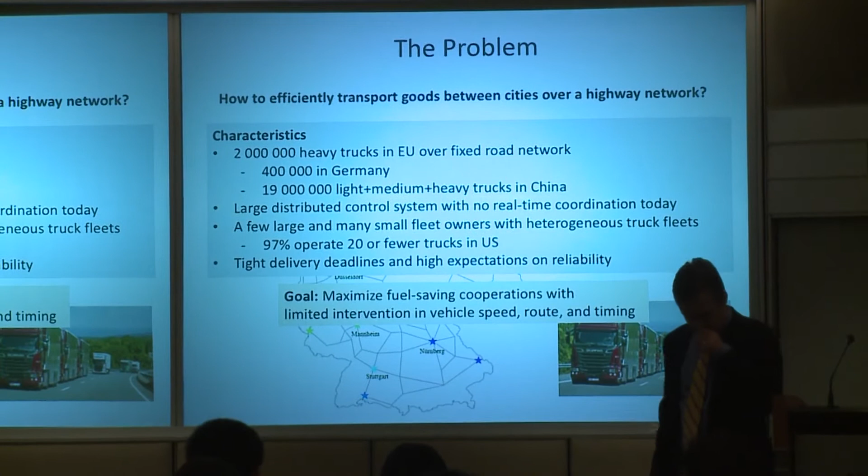And that's how it works. It also has some other characteristics which are quite interesting when we want to formulate this as a scientific problem and solve it. Of course there are a lot of constraints and objectives and so on, but I will try to simplify the story to start with.

So the problem I'm interested in is, compared to what's being done today, can we do this in a more efficient way by not changing completely how we drive around over this network, but adding cooperation in a systematic way? What you will see is that cooperation will mean trucks traveling together in vehicle platoons, but also other types of cooperation. So that's the problem I'm interested to understand. How much could we do on that?

And what could we say? How can we motivate this problem? What are the characteristics? If we start from a societal viewpoint, what we can first of all say is that this costs a lot of energy in society. Transport, as you know, on a broad scale, is 1/3 of all the energy we are spending in the world. And freight transport on roads is a dominating type of transport when we look at surface transport.

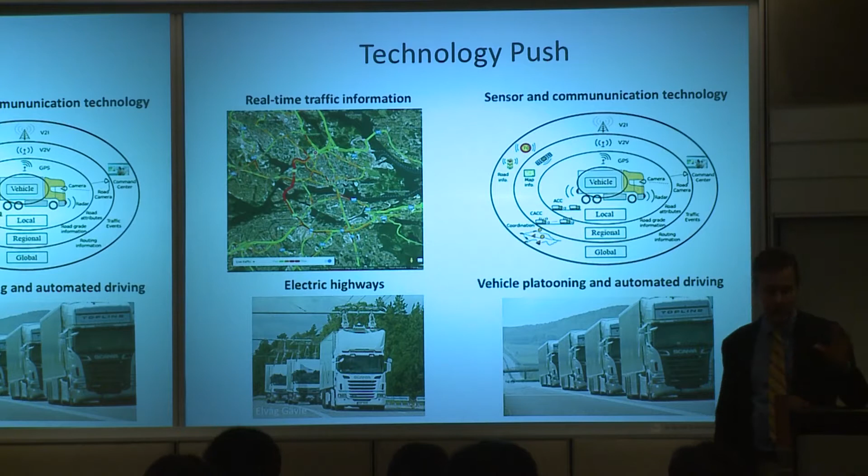So if they do that, what we can do is allow these 2 vehicles to go together in a platoon like this. And if they do that, they will save some energy. If we now would know all the different transport missions going on over Europe, we can try to do matchmaking automatically.

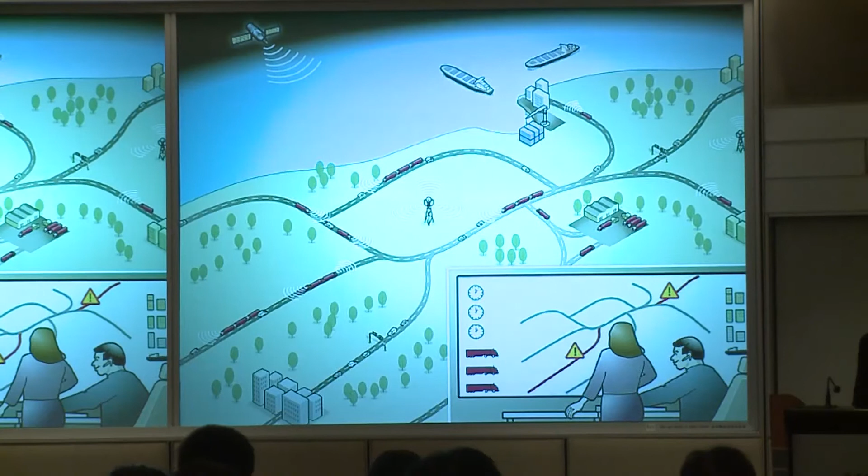I will come back also to talking about what other industries are doing. So you can say that basically all major truck manufacturers today are investing in this. It's a big area now.

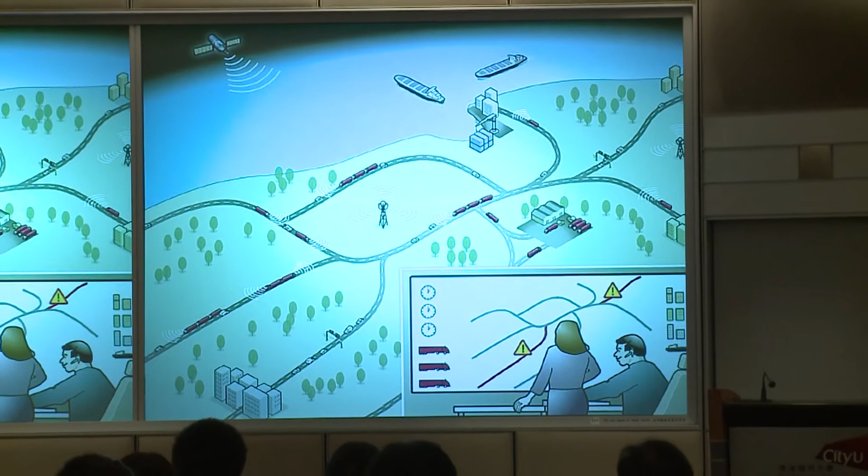The picture I want you to have now is to think about that in the future we will have a situation like in my cartoon here. So you see that we still have transportation from ports to cities to industries and so on. The difference is now that they will go in platoons, and they will form these platoons on the road.

We could describe this as, in many cases when we look at control of complex systems, in a hierarchical way. So what I talk about here is that on a lower level we have the vehicles and the platoons. One level up, we have something which I call cooperation - with that I mean we need to be able to interact with the other vehicles out on the road so that we can form these platoons on a large scale. And further one level up, we have something here which I call a fleet layer.

This gives possibilities so that you have two different fleet owners, those who have 10 or 20 trucks each - they could collaborate now. Today you don't collaborate because you don't want to give up your customers and so on. But if you construct a market out of this, you can open up a completely new type of business. So that cooperation could be done on the fleet layer, and typically the big ones have something like you see here down to the right, namely people working in a back office - maybe in Stockholm if you have operations over Europe, where you follow all the trucks, a little bit like air traffic management.

So in my talk here today, I will describe a little bit from bottom up here, from the platooning to the formation to the fleet coordination.

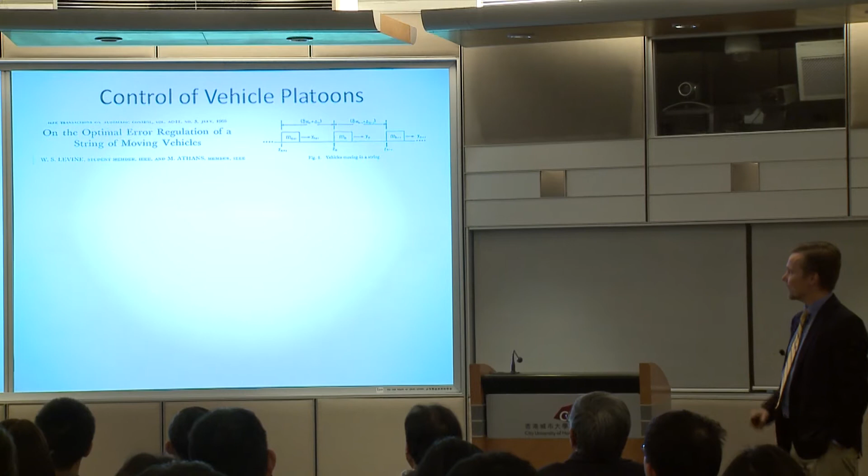Let's start with vehicle platooning. Control of vehicles has been studied for a long time in the control area. More than 50 years ago, there was a paper from MIT: Bill Levine and Mike Athans wrote about controlling a platoon of vehicles as a string of masses, and developed some theory around that.

The biggest success when it comes to platooning is probably the PATH project in California, on the automated highway, where they demonstrated outside San Diego in '97 that they could control a string of vehicles going close together, and also described how the whole system could be automated.

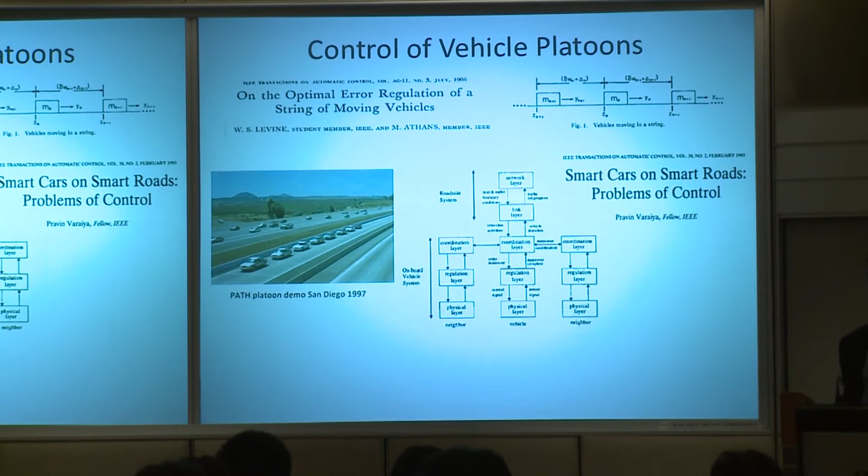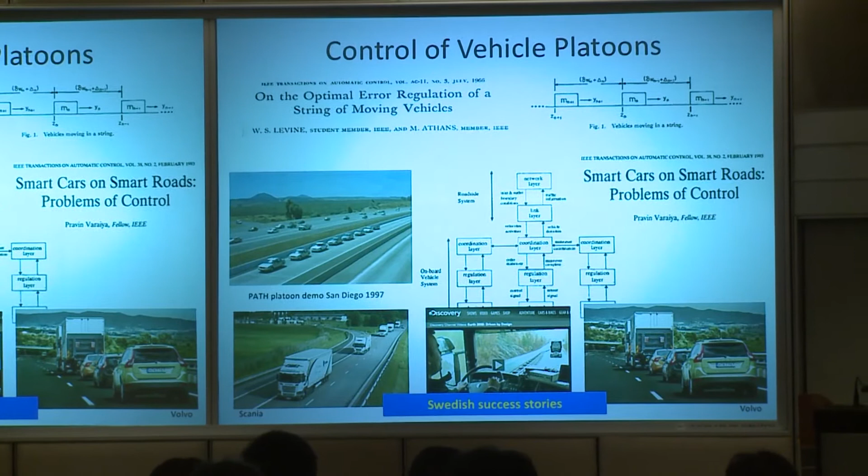Since then, a lot has happened, particularly in the last 10 to 15 years, and that's what I'm going to talk about. In Sweden, we have two commercial truck manufacturers, Volvo on the west coast and Scania on the east coast, and both have been early adopters of this technology. We have projects with both of them, though of course they are fierce competitors, so they don't give up any ideas to the other.

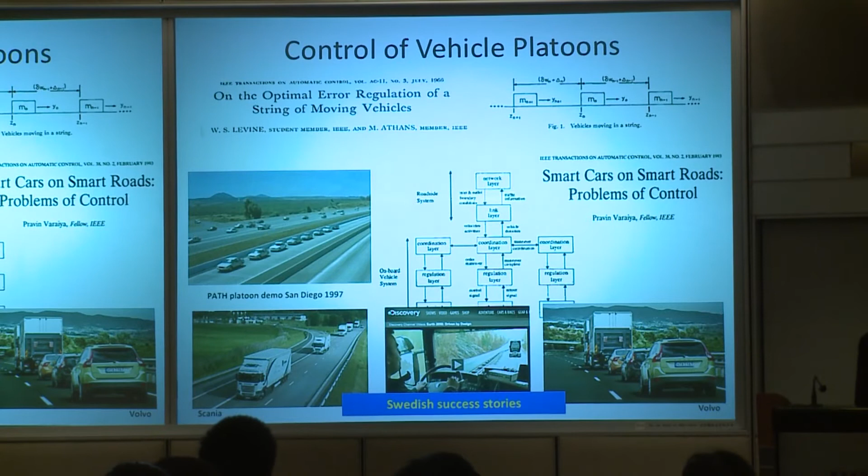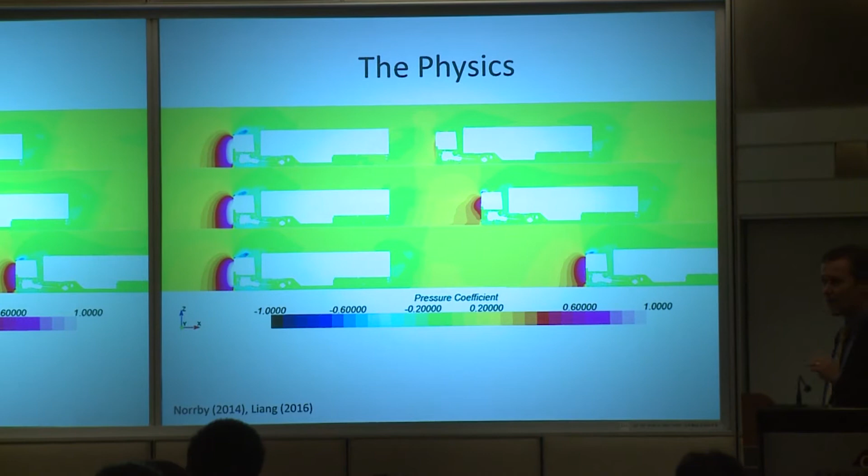Let's first go back to physics. Why do we do platooning with trucks? It's very simple. Here you see a CFD simulation where the color indicates the air pressure. You see that when there's sufficient distance between the two vehicles, the air pressure they experience is about the same, while when moving closer, the air pressure is reduced significantly.

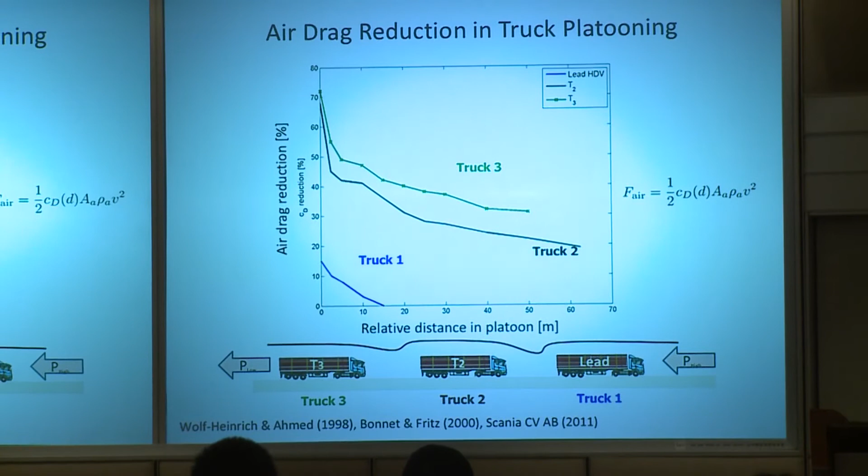So if we make the distance between the vehicles smaller and smaller, you see on the x-axis the distance, 10, 20 meters. At that point, the air drag reduction, on the y-axis, can be up to 40-50%. That's very much, and it means the fuel reduction for driving the truck can be something between 5 to 20%.

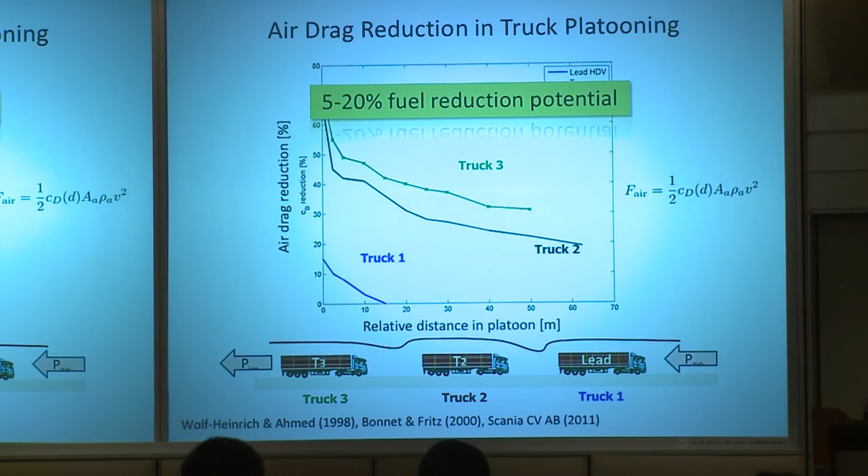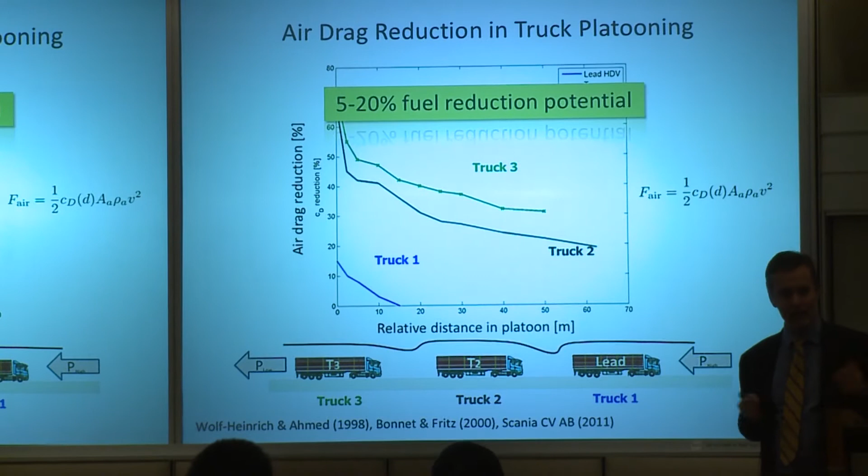Why that range is so big depends a lot on experimental conditions. Nominally when we run, it's typically 10%. And if 10% of the fuel can be reduced from something that consumes 10-15% of all the fuel or energy we spend, you can imagine this is an enormous figure even if it's just a few percent.

Of course, we cannot do this if we are not automatically driving the trucks. We get this benefit when we are 20 meters or so apart. So we want to be that close, but we cannot expect a manual driver to drive that close, so we need to do that automatically. Let's go into detail on how we control the individual vehicles in this platoon.

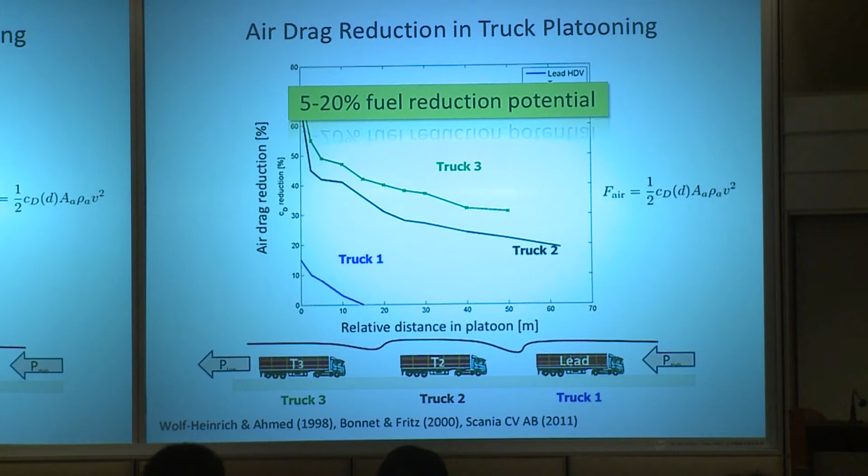To start with, let's go back to a single vehicle. How do we automatically control the velocity of a single vehicle? This is not as simple as just keeping constant velocity as it used to be. Instead, what we do...

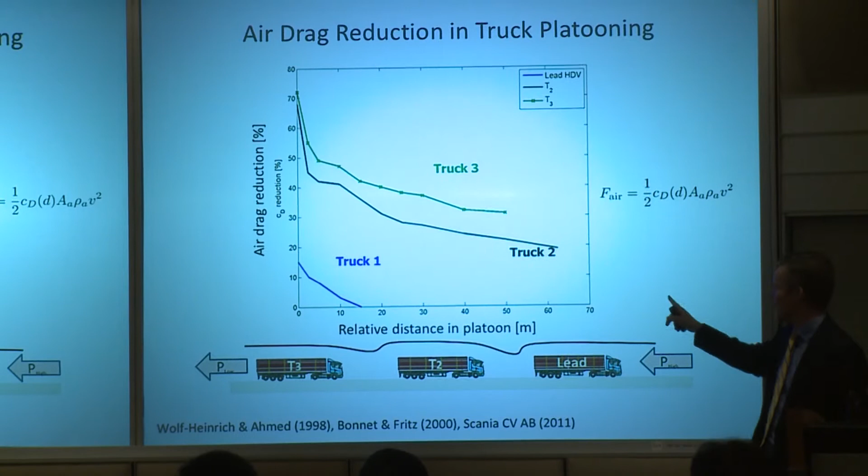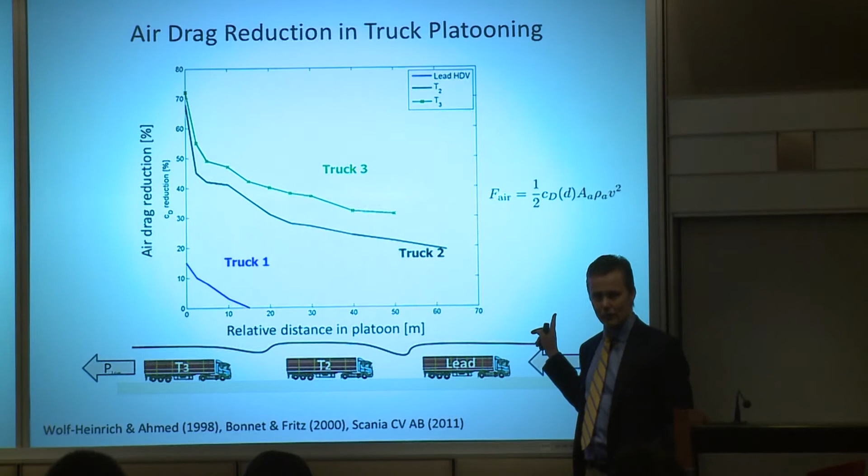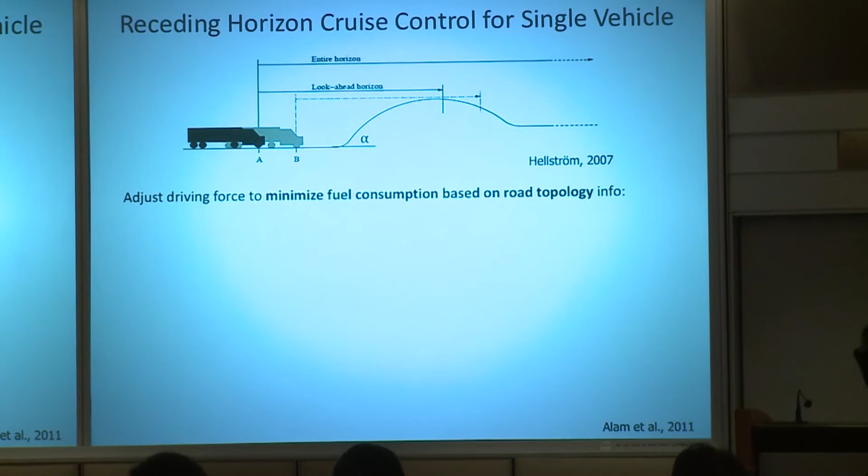So what you do to regulate the velocity is solve online an optimal control problem. It's not very advanced, you can go back to the classics. You formulate the fuel consumption for a vehicle that should traverse a hill with some slope alpha, and formulate the cost function for fuel.

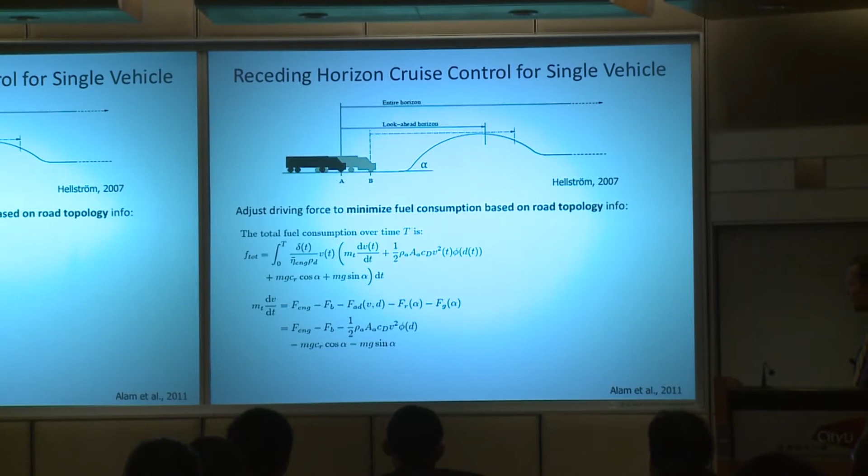So how much fuel does it cost? You get an expression like this, where you integrate over a horizon, typically a couple of kilometers that covers that hill. Then you write out Newton's equation, and you get an optimal control problem which you can solve. When you solve this, you get solutions which are very intuitive.

What you see down here is that we have an uphill, so this is altitude going up and altitude going down. In the bottom plot you see the velocity. If you have a light truck, like the blue one, you see that you should just keep constant velocity. If you don't have to, you shouldn't change the velocity. It's always best to go with constant velocity.

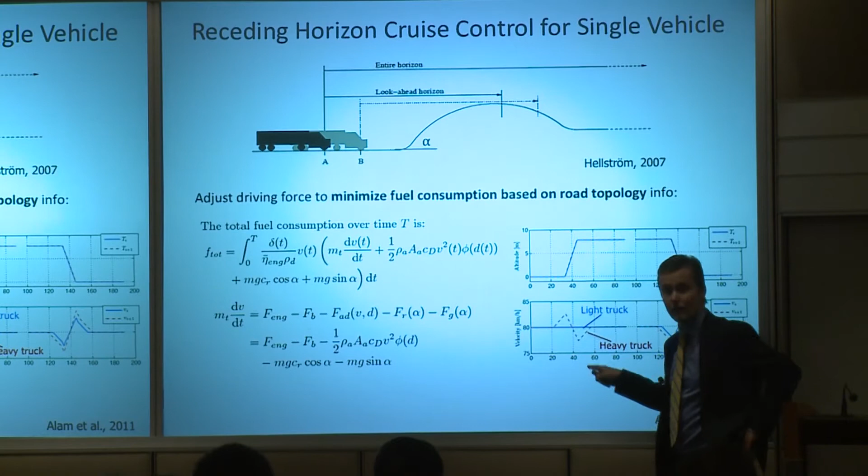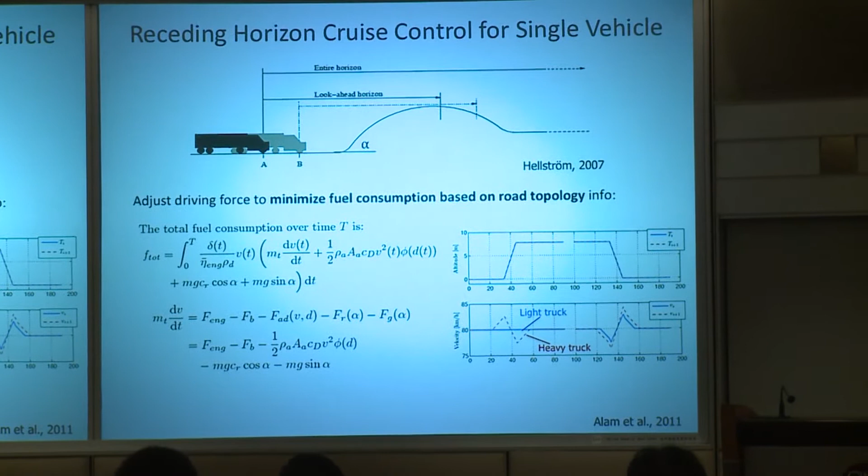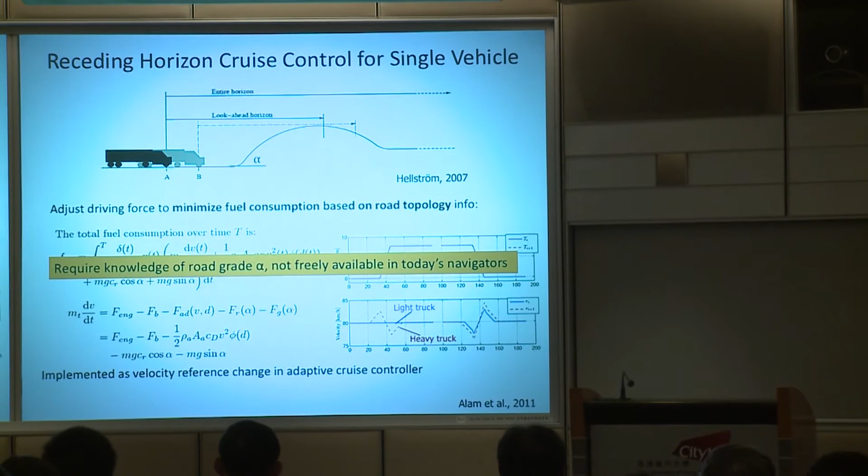But if you have a heavy truck, the optimal thing to do, as you see here, is to speed up a little bit before the hill, then let the velocity go down, and vice versa in the other direction. So this is optimizing the fuel and reducing it a little bit. This suggests the optimal velocity, and you can implement this into the controller that keeps the velocity. Of course, this assumes you know the road grade, which I will come back to.

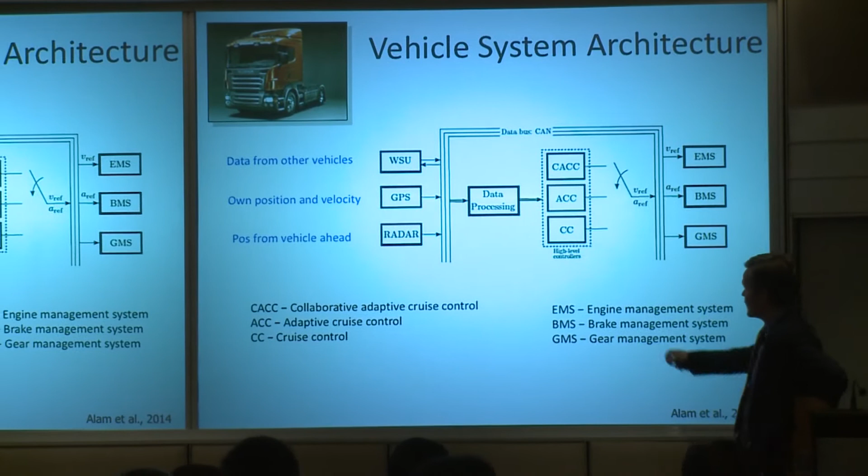So that is the control mechanism we have in place today. Let's now look at the control architecture inside the vehicle. So here you see the control system. From the left we have the sensor information input, so data, for instance, from other vehicles, their position and so on, and we know our own position. That goes into the controllers, the different cruise controllers here in the middle, and then we actuate over here.

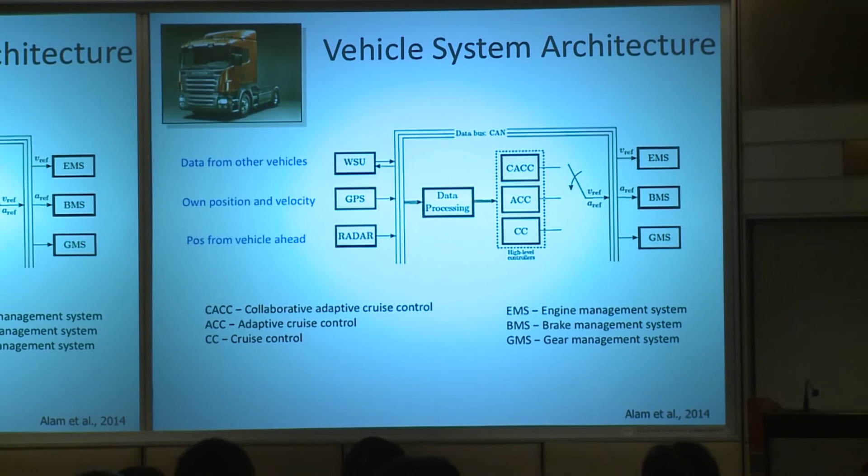I talked already about the engine management system, that is where we send the reference velocity. But of course we also need to control the braking, so the braking management system and the gears, the gear management system. So this is basically the control that we have.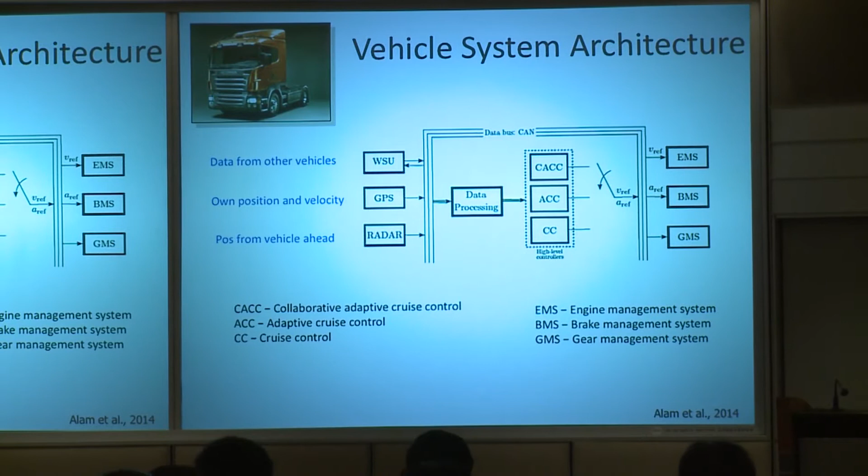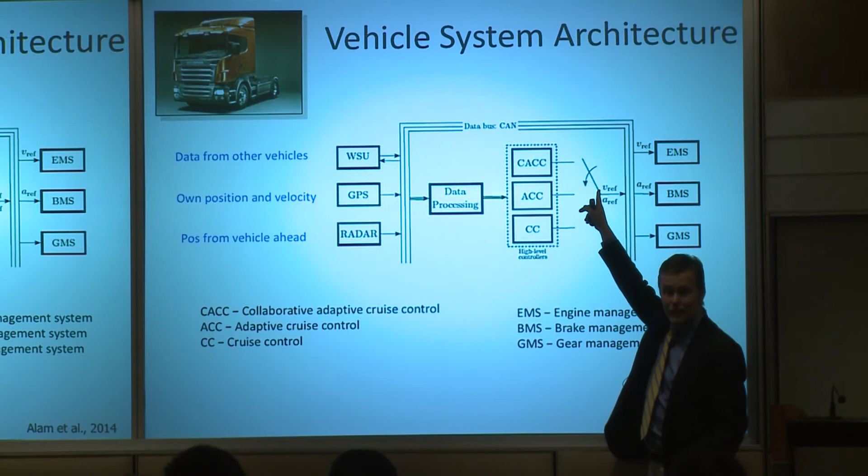I put this slide here just to emphasize that when we do something more advanced, like the CACC, the Collaborative Adaptive Cruise Controller, which is the platooning, I don't change basically anything in the vehicle. I only change a piece of software that sits here. Another thing is who has control of that switch - the driver has control of it. So we don't at this point take over completely from the driver. The driver can always decide what he wants to do.

If he accepts that we go in a platoon, then we run a system which would just look like that, right, what you would expect. Where vehicles are exchanging information either via their radar, so they measure their distance to the vehicle in front, or via wireless communication - either Wi-Fi, vehicle to vehicle, or vehicle to infrastructure, and infrastructure back to vehicle.

So let's go into a little bit of detail on how the control is being done on the lowest level. What I said was that it's important to be close, right, so we want to regulate the distance between the trucks. And it's obvious if we have a long string of vehicles that we would like that to be distributed - maybe each vehicle would like to just control based on information from the vehicle ahead and so on.

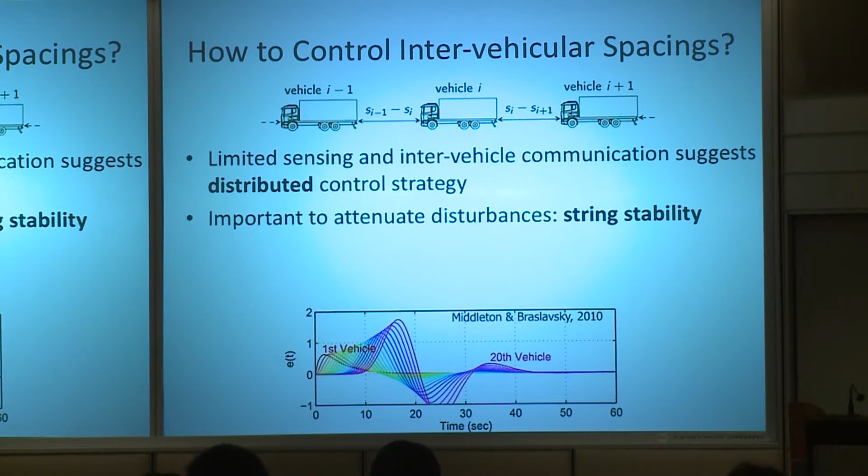That problem has been studied for a long time, and it's well known that what we can get is something called string instability. What that means is that the disturbance in the first vehicle could propagate and increase as we go down the string, as you see here. That's what we want to avoid, and there have been different studies on when we can avoid that. What's important is that most of these studies are theoretical.

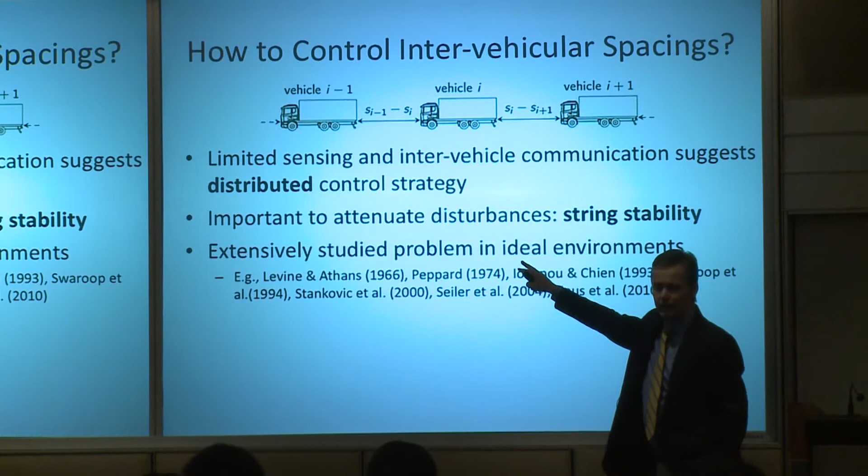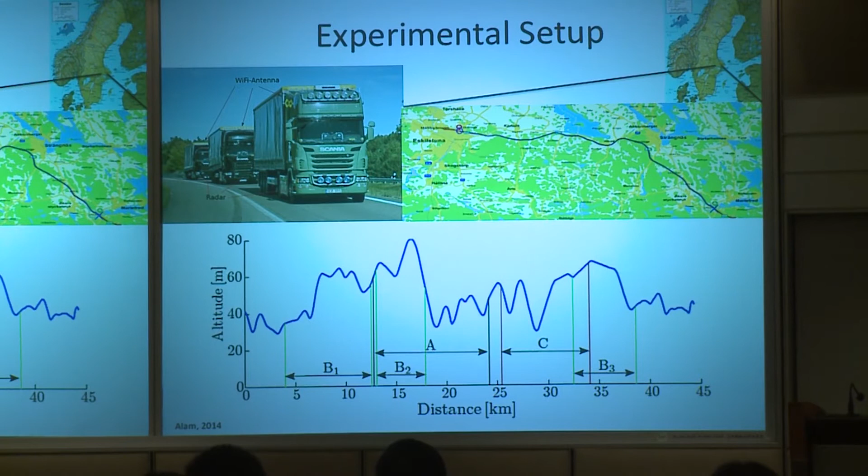After these experiments we looked at the data. Again, the control architecture was that simple, distributed one I mentioned: each vehicle controls its own velocity, and then it communicates to the controller behind. This is what we achieved - in the top plot here you see a segment, just a few kilometers.

So it's an uphill, downhill, and so on. The second plot shows the velocity. The third is the distance between the vehicles. Here you see the torque generated in the two first vehicles, and that's the braking of the second vehicle.

As all of you with a background in control or vehicles can see, this is bad, right? You see the second vehicle, the black one, when we are going downhill there, the velocity oscillates. The first vehicle, the blue one, is doing something you would expect: the speed picks up because you're going downhill. The second vehicle should just follow that vehicle, so it should have constant velocity, but it's not. There are oscillations, and we see the distance between them is oscillating too.

And you see even so that the second vehicle has to brake. And we talk about saving fuel—so the worst thing you can do is brake, because that means you are losing fuel, right?

So when we got this—my student who graduated in 2014 did this experiment some years earlier—when he got this result, we didn't look there first. He just looked at the data of how much fuel you would save over these three weeks of platooning, and the total amount of fuel saved was something negative. So he came back to me, his advisor, and said, I cannot defend my thesis on platooning now because I've shown that you spend more fuel with platooning.

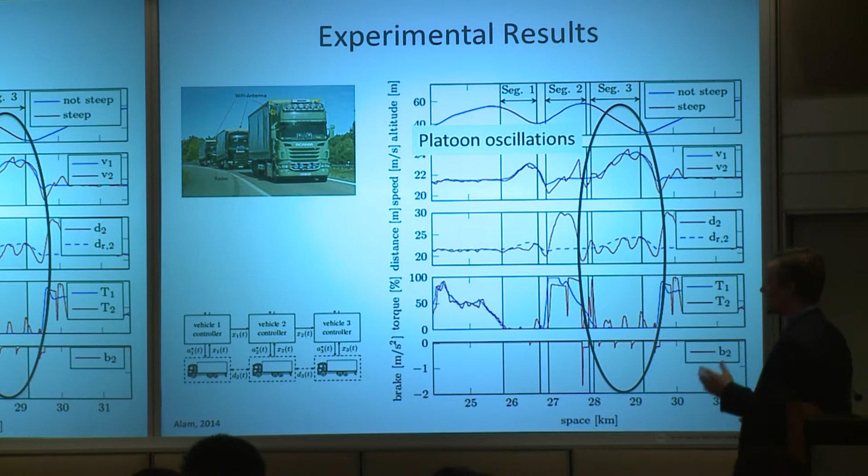But that was, as with many good PhD theses, an encouragement to start a new PhD. So we went in and started to look at the data, and that's when we found there were a few segments like this where the controller was doing badly. And then we thought maybe we shouldn't trust this control architecture in the literature—maybe we should think a little bit about that.

Two important things here: one is that topography variation, the hills, maybe plays a very important role that we hadn't thought about before. And another thing is, how should we regulate the distance between the vehicles? Maybe we shouldn't regulate the distance—maybe we should regulate something else. I'm going to show a little bit what that means and our new controller that we came up with.

So let's do a simple thought experiment just to see our idea before we get into the mathematics. Let's say we are driving on a flat road and then we come to an uphill. We will never know perfectly where that uphill is, right? We always have some uncertainty. Let's say you want to keep a constant velocity.

Then what this vehicle is going to experience is a little dip in velocity there, exactly where it hits the uphill. I can plot that over time, to the left, or I can plot it over space along the road. For a single vehicle, there is no difference—it will just look the same.

Now what I do is put a platoon there, and say that the second vehicle can perfectly control its distance to be d to the first vehicle, and the third vehicle can also perfectly control its distance to the vehicle ahead. So, perfect control here—what is going to happen?

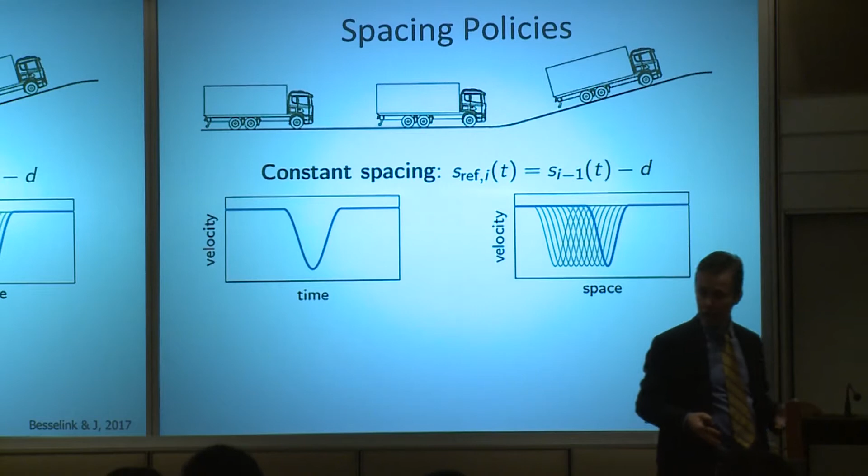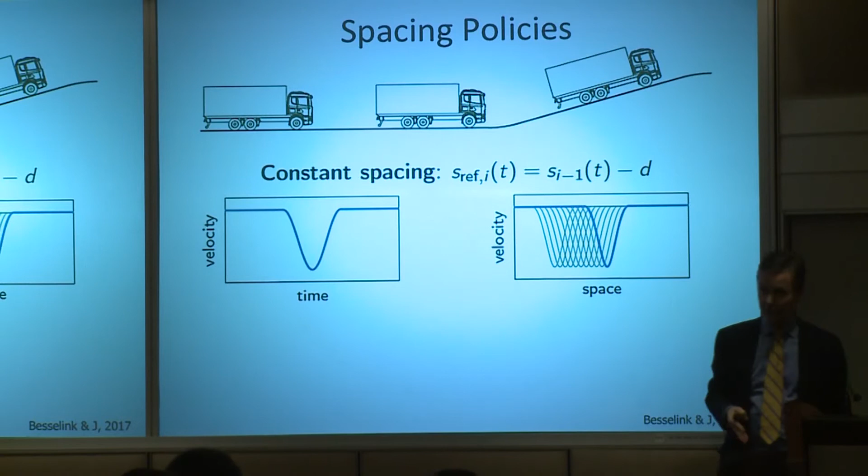When the disturbance of the road hits the first vehicle, all the other vehicles are going to experience the same disturbance, right? Because we have the same perfect control. But if we look at what is happening in space, the disturbance is going to hit at different instances in space. And if you animate this picture forward, what happens next is that the second vehicle is going to experience the same uphill, so it gets the same disturbance twice, and then the third. So you see that there is something that could happen—some sort of propagation of that type of disturbance that we didn't take into account in the controller I showed you.

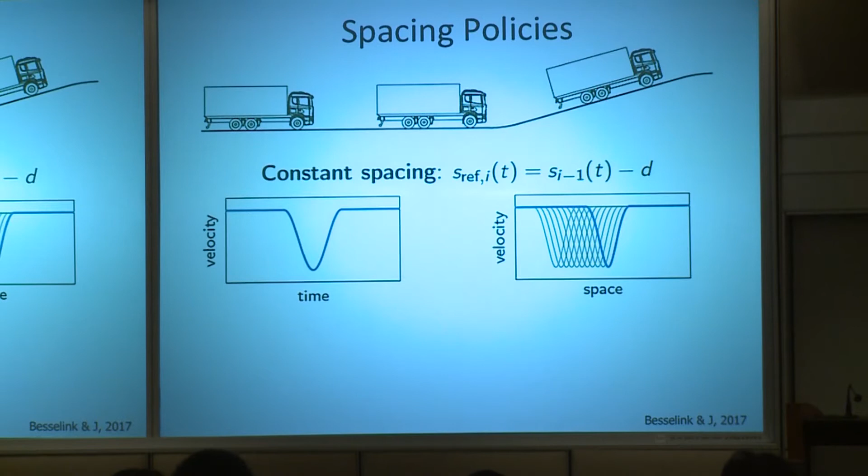Then we can regulate on something else—we can regulate on the headway, or on a time gap. So in this case, I try to keep delta t—I'll come back to what delta t is—but I try to keep a time gap. And if I keep that time in a good way, I can get the completely swapped situation to the one I had before. I can make sure that in space now, the disturbance is going to hit us at the same point. And that seems to be a good thing to do.

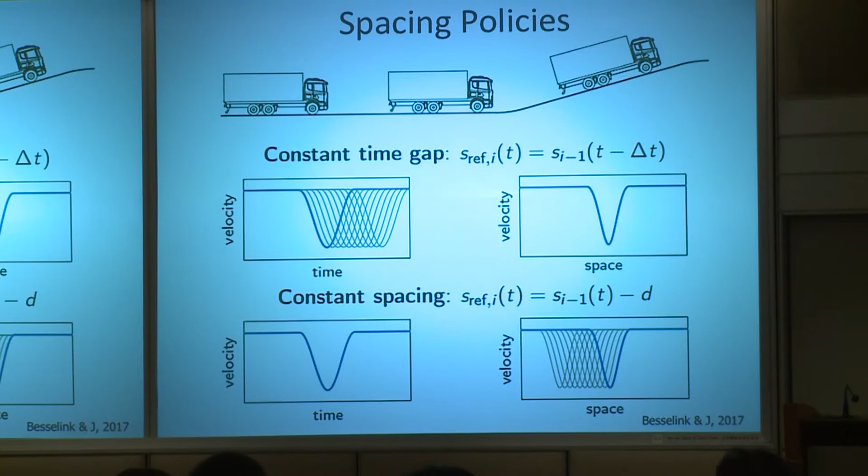So if we believe that is a good thing to do, what are the consequences? One very interesting consequence from a control architecture viewpoint is that keeping a fixed time gap between vehicles is equivalent to keeping the same velocity in space. So it's like encoding a reference velocity along the road, that's what I've written there. So what consequence does that have for a control objective?

Instead of regulating one thing, we should regulate two things in hierarchy. We should make sure every vehicle is able to keep that velocity over space, and then regulate their relative position according to this time gap. So it's a control architecture where we pull out the reference and let someone else decide that, and then we do this local regulation. This we can also motivate with some theory.

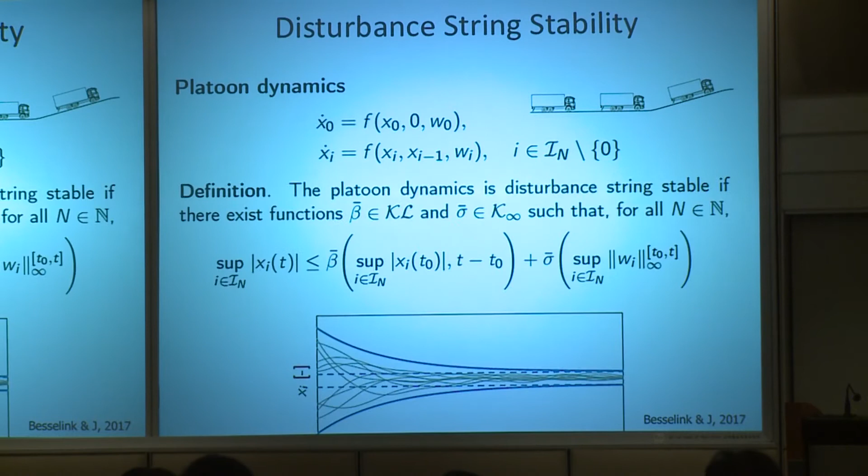We put this in a framework, and since string stability has been studied by so many, we develop a formalism on disturbance string stability. We have a number of vehicles given by some dynamical control system with input disturbances, and we say we would like these to be string stable in this sense—it's an input-to-state stability concept. We have some initial condition and some disturbance, and we want the state of each vehicle to be bounded for all vehicles in the platoon. This is the stability notion we are using here.

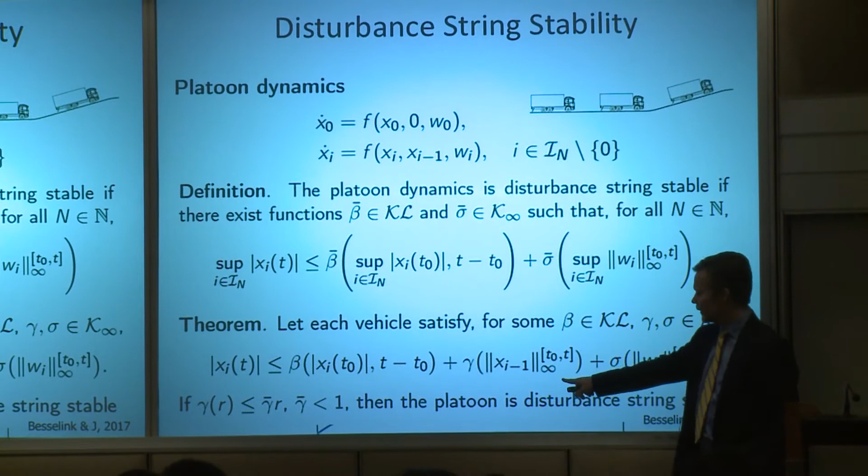We want to develop various types of control on top of this, so let me give one example. One thing we can prove is that we can take this concept and make it local. We can prove that if I can keep every state bounded by its own initial condition, what the vehicle in front is doing, and the disturbance—if I'm able to do that, a local condition—then the whole platoon will be stable in that sense I introduced before.

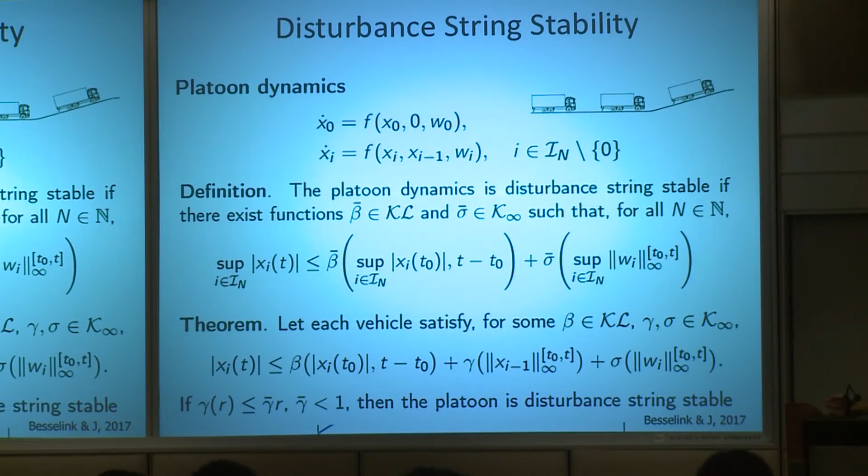Okay, so this seems fairly abstract, right? Can we actually come up with controllers that fulfill this? And we can—let's look at one such controller.

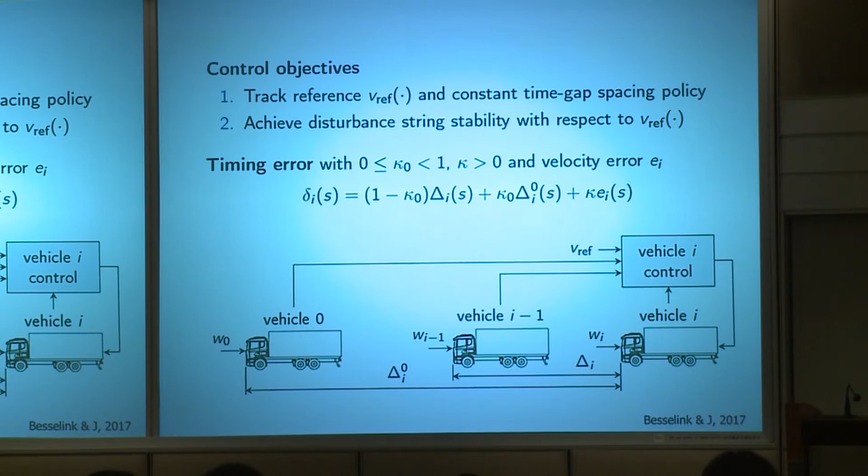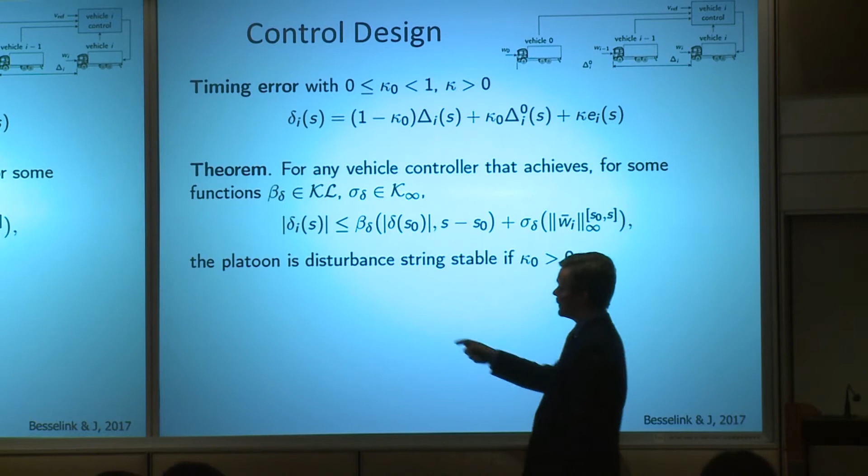In one case, I introduce a quantity—I call it small delta I. This is a quantity I would like to keep small, and it depends on the time gap to the vehicle in front, plus an error term, which is the velocity error. So I've weighted together how well I'm able to keep the time gap with the error in velocity, and that's what I'm controlling. If I'm controlling that well—and that's what this theorem says—if I'm able to keep that delta small in that sense, then this is string stable in the sense introduced before.

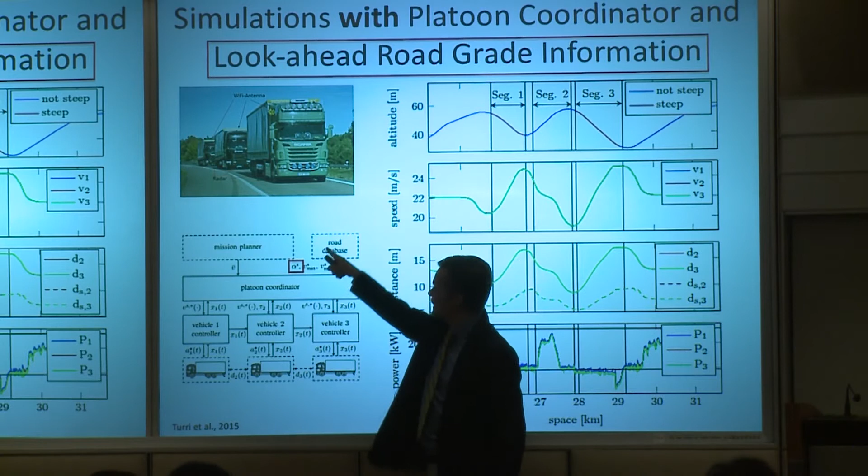Let's try that on the experiment shown previously. Notice two things: first, look down here to the left. This looks a bit more complicated before, but I only made two major changes. One, I've introduced the road grade—I have a road database that tells me the road grade, shown in the top diagram. I plug that into a new block called the platoon coordinator. The platoon coordinator computes the velocity, this vref I told you before, and communicates that down to the vehicle controllers, which execute that—they control so we try to keep close to that.

These are hi-fi simulations with very detailed vehicle models, and in this case it works very well. The velocity is changing, of course, because of the formulation I had, but all vehicles are able to keep that velocity, which in this plot is defined over space. Over time they will change, of course. Also notice the distance between vehicles will vary a little bit, but they vary here to benefit fuel consumption. So this is the way we choose to do the control in this layered way.

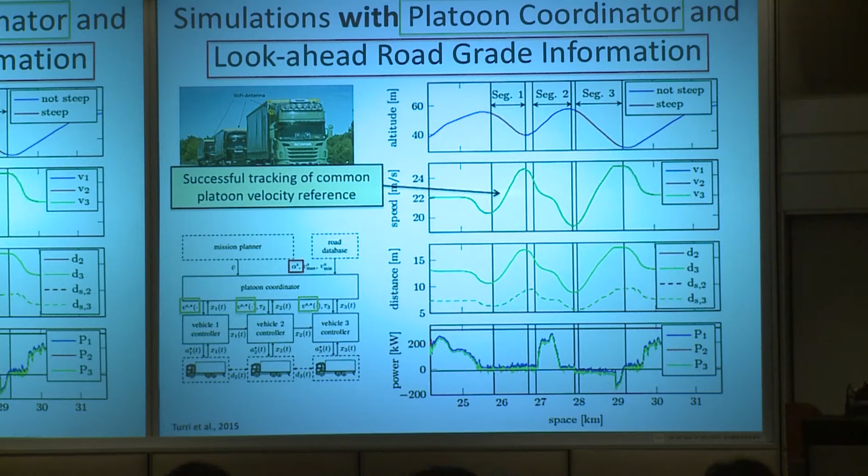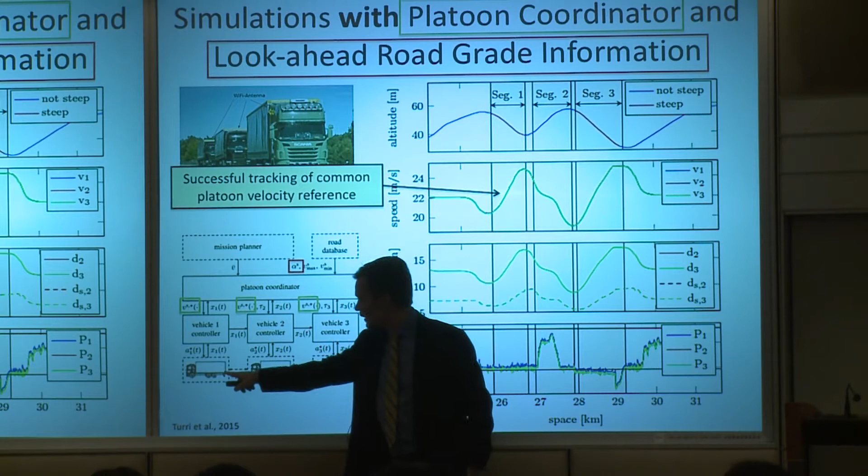Notice now that I didn't say where we compute this—who computes this platoon coordinator. Should that be done in the first vehicle, in all vehicles, or should it be done in the infrastructure?

This is one thing we are working on now: we try to move this out and put it in the cellular network. So if we think about having a cellular network, or if you're into cloud computing, you call this the edge cloud or the fog, right? You can think about controlling this process from the base station, and you move that control process with the mobile vehicles and do the control in this way.

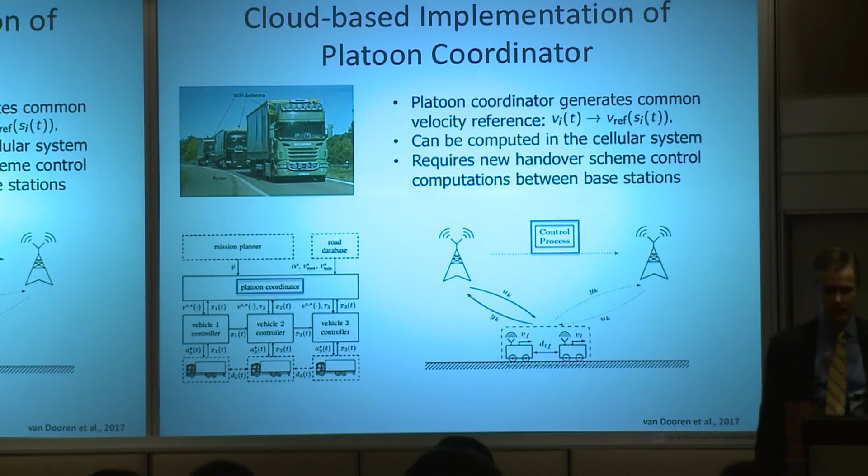Interesting also from a communication viewpoint is that this requires some changes to how the mobile system works. Because remember, even if me and Professor Cheng sit in the same car with our mobiles, the handover when we move from one base station to another is not synchronized. It could be that your mobile changes before mine, and so on. You measure more or less the quality to the base station, and this is an independent process.

Imagine now that you have 3 vehicles that you want to move together, connected to the base station. It's more or less like having 3 different mobiles, or 6 if you have both transmitters and receivers. So this wouldn't work if you don't coordinate it. You want a process where they move synchronously, because we're moving the control from one base station over to another, so that needs to happen in a synchronized way. This requires some changes to how handover is done, and we've developed some of this together with people working on it at Ericsson.

Okay, so this was a little bit on the lower level, on vehicle platooning. Let's now move up and think about how we should form platoons, how we form them online. The way we are doing this builds very much on what you saw before.

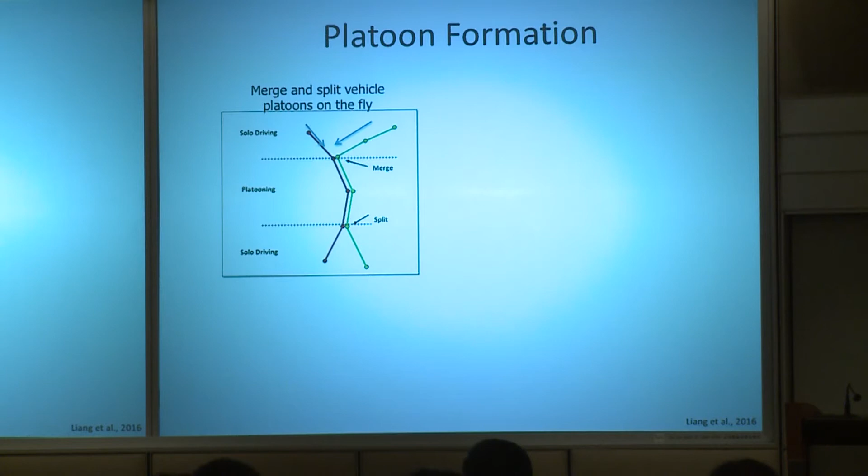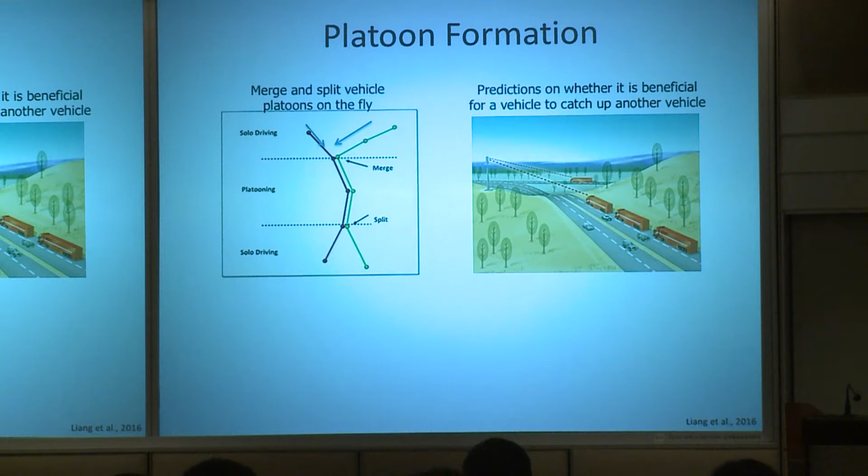Let's say we have vehicles coming from different directions, sharing a segment, and then splitting again. The way the platoon is formed is that we have control of these vehicles from the infrastructure, as you see in this picture. From the infrastructure, you compute a reference velocity, just like you've seen before, and this reference velocity is generated in the infrastructure and communicated down to the individual vehicles.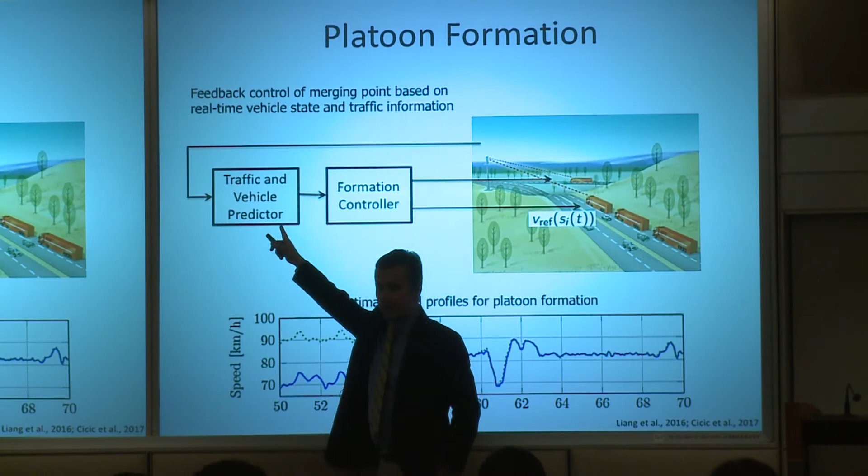The difference now is that we need to take into account traffic. Because if there is a lot of traffic around, you need to handle what velocity you will be able to keep in order to form that platoon. This understanding led us to try to understand better under what circumstances one could form platoons.

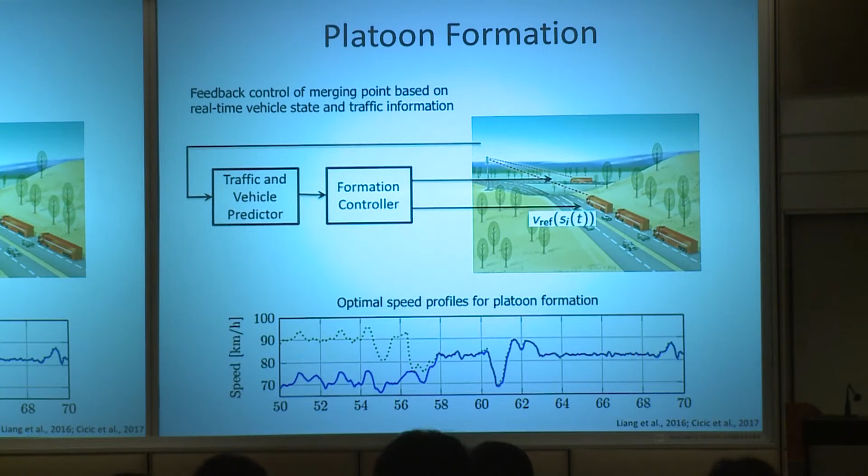As always, I think it's good to go to some experiments and see how this works. What you see here are experiments we did outside Stockholm, on a highway segment, just 10 kilometers or so. We went and tried to form this platoon over and over again. In these videos, we are sitting in the second vehicle, trying to merge with a vehicle in front of us.

This was done over 600 such test runs. I was not driving the vehicle, but anyhow, it was over a month or so. Notice that now and then we are passing these gates.

These gates have sensors that sense the flow, the velocity, and the density of vehicles. Out of this information, we can analyze data and get, so to say, a steady-state situation of traffic, and this is what in traffic theory is called the fundamental diagram. Here you have the density of vehicles on the x-axis, and on the y-axis we have the velocity or traffic flow.

You see that if we have low density, we get a linear increase of the traffic flow, which is what everyone would expect. Then at some point you reach the limit where the road isn't able to handle more vehicles, and you get saturation and congestion.

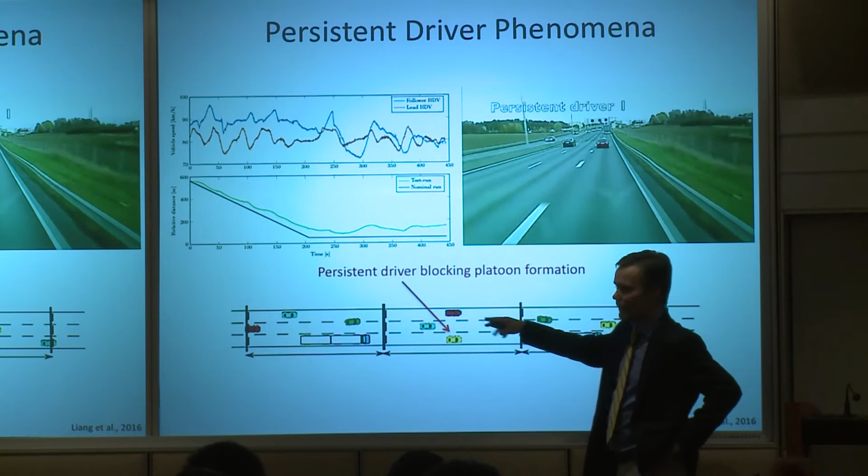You see that we try to form a platoon with the vehicle in front, but there is a red car there. In general, trucks are supposed to drive slower—they typically drive 85 in Sweden, while cars drive around 110 kilometers per hour, so they will pass, right? But in some situations, this happens.

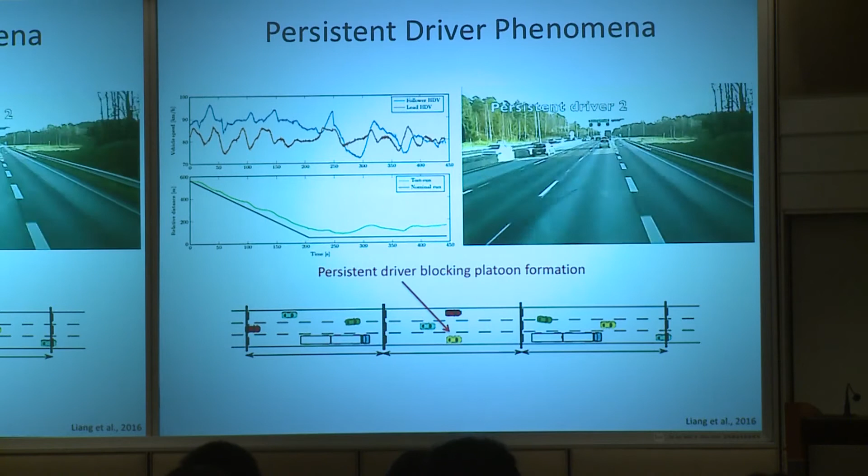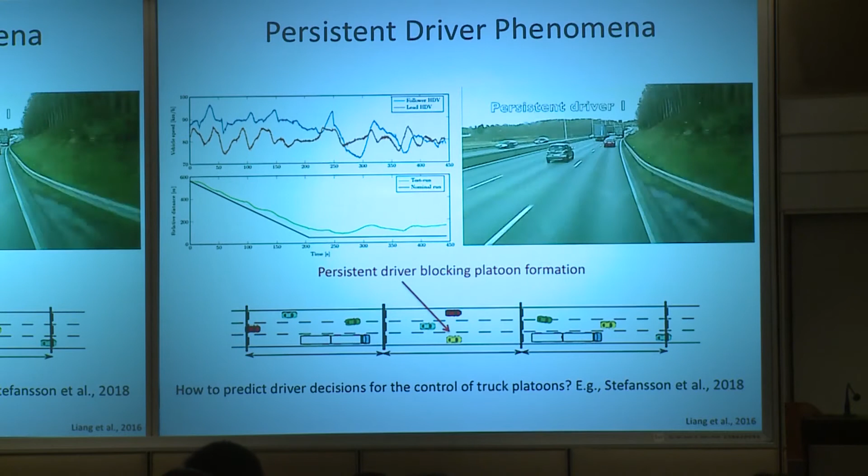We call this a persistent driver phenomena. So we have this fact that the human driver didn't behave in the way you would expect, and it happens sufficiently often to think about how we can predict the human driver's behavior and handle that in this type of situation. I don't think anyone working on automated vehicles has a solution to this problem of how to handle human drivers, but at least it's important to think about how to do that.

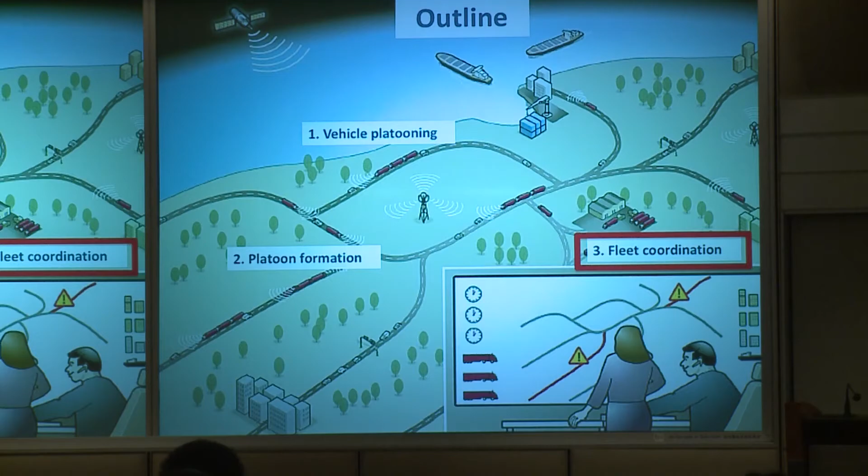Okay, let's go to the last part, the highest level I would like to briefly talk about: how do we coordinate a large fleet? Large fleet meaning over the whole of Europe, like I said in the beginning. One thing we have developed is a very pragmatic way of solving this matchmaking problem.

The default information each vehicle would have is its most efficient route to the destination—how it should drive. Everyone would know that from the start, right? And if you know that, what you could then do is adjust your velocity a little bit so that you maximize the amount of platooning going on. So you solve an optimization problem, which is basically a time scheduling problem.

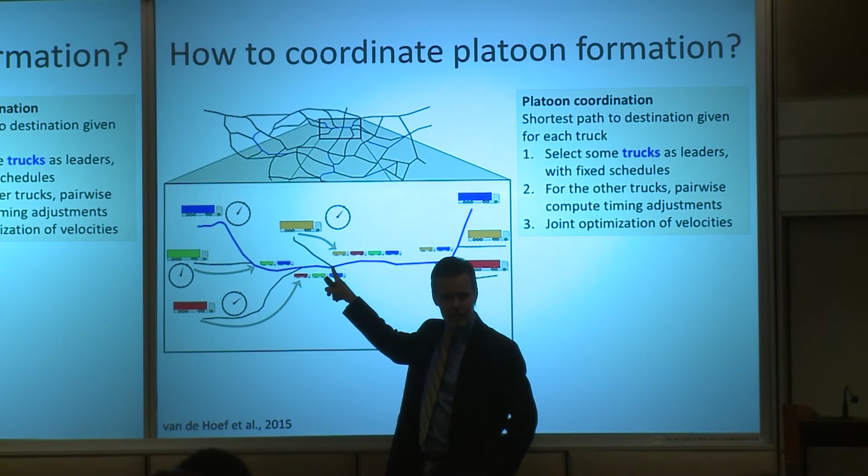We don't allow stopping any vehicles, we just adjust the velocity slightly, some kilometers per hour or so—changes the drivers wouldn't even notice, but that would maximize this type of platooning. We've studied this in big numerical studies, but also implemented it and ran it over Europe with vehicles going from Sweden, Stockholm, all the way down to Spain.

Not with very many vehicles, but just to see that the concept works. It's also interesting to think about how a whole coordinated system like this scales, and how large an implementation we need for it to benefit. So we ran some studies, again on the German highway network. How large a penetration do we need? I said earlier there are about 400,000 trucks running around there—do we have to implement this in half of them, or how many? This can be studied by numerically estimating how much traffic assignment happens between different areas.

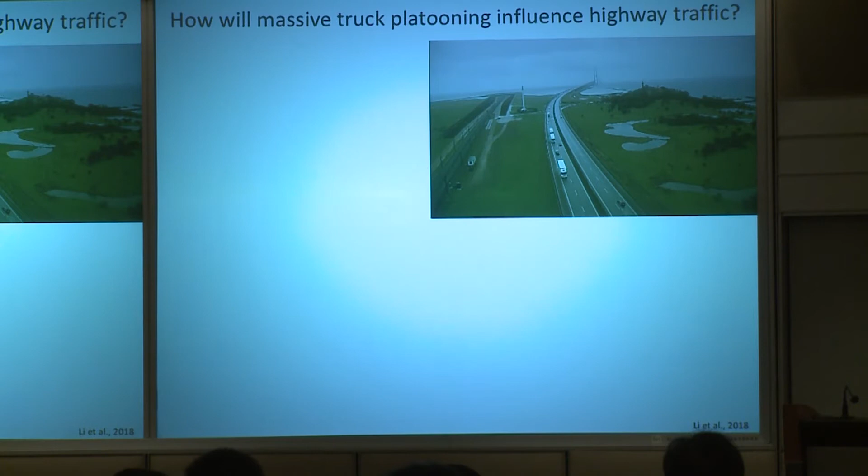The last thing before the conclusion—something very recent we've started to study. When we have massive truck platooning, seeing these platoons all over the highway, how will they influence the rest of the highway traffic? Of course there's a difference between driving this platoon together, like in this video, versus going individually. But could we try to have some theoretical understanding of the consequence—is it good or bad? It would be nice, right? We've made some first attempts at this problem.

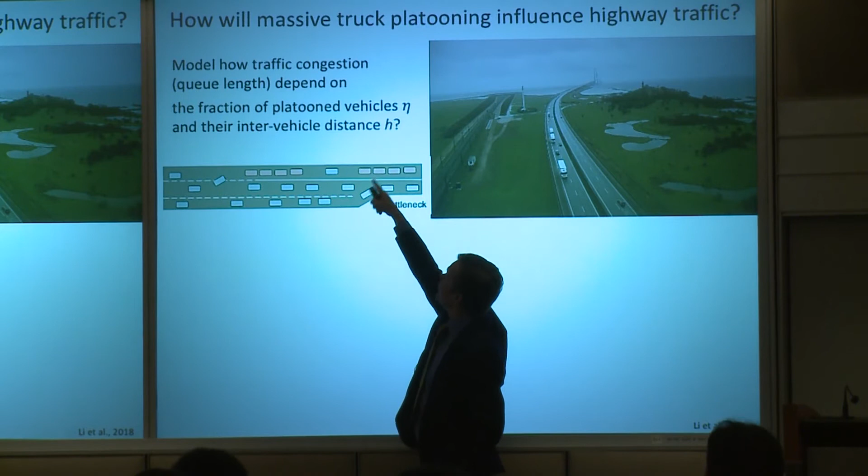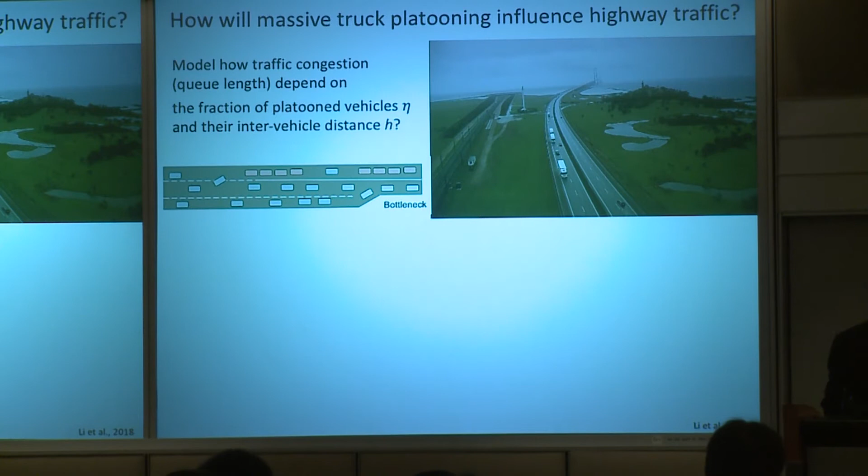We try to model traffic congestion using a queuing model that represents the scenario you see here: the red vehicles are going in platoons, and the blue are the rest of the traffic. Then we wonder—if more of the fraction of total vehicles is red ones, what's the consequence? And if those red ones go closer together, or if the inter-vehicle distance is larger, what's the consequence of that? With this fluid queue model we've considered, we get results like this.

So as the fraction of platooning vehicles increases, the average queue length, so the congestion, is decreasing. And there's even a magic number where we get down to no congestion at all. And the same thing if we let the average distance between vehicles go down, the overall performance of the highway gets better and better.

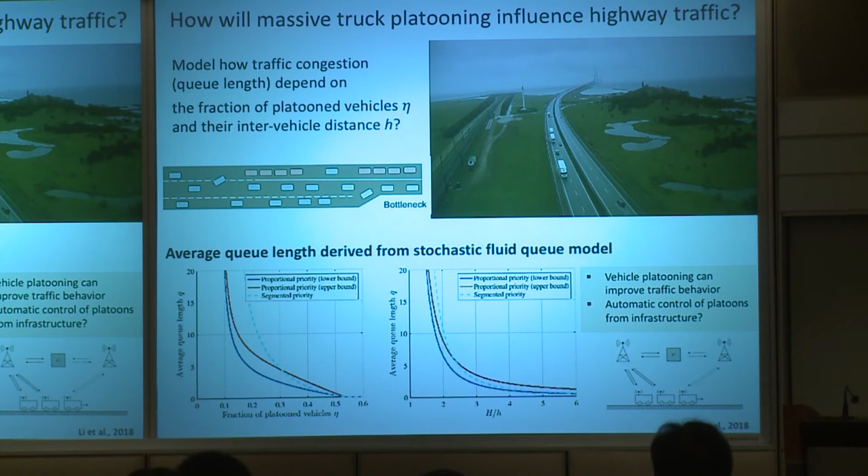I won't have time to go into detail of this particular model we developed. But if you want to speculate about the implications, think back to that picture of control of automated vehicles from the infrastructure. Instead of just minimizing fuel, which is a local optimization, we can think about a more social optimum - how to optimize what a highway during different times of day is able to capture, serving the vehicles driving there as well as possible.

So with that, I'd like to come to the conclusion. I hope you agree that this type of problem, cooperative road freight transport, is a great problem. There's a lot of networking, control, communication, sensing and so on. It also opens up the possibility to connect different layers - scientifically, the highest level is logistics and operational research, the lowest is maybe mechanical engineering. But what I describe here really connects them, where the connection is information and communication technology and systems and control coming in.

There are many more things - if you gave me another hour I'd be happy to talk about them, but I'll just mention it here to open up for discussion. One thing is, what's the cost here, and what should we optimize? I mentioned global and local objectives - should each driver or vehicle get paid depending on where they drive in the platoon, or should it be a service where you pay to join? And from a fleet owner perspective, how should that market look?

Just to see that this is non-trivial: if you have many vehicles, like DHL, versus just 5 vehicles, the one with many vehicles benefits the others, because you provide more opportunities for platooning. So you might not want to give that up to the others. So you have an asymmetric market, which is quite interesting to study.

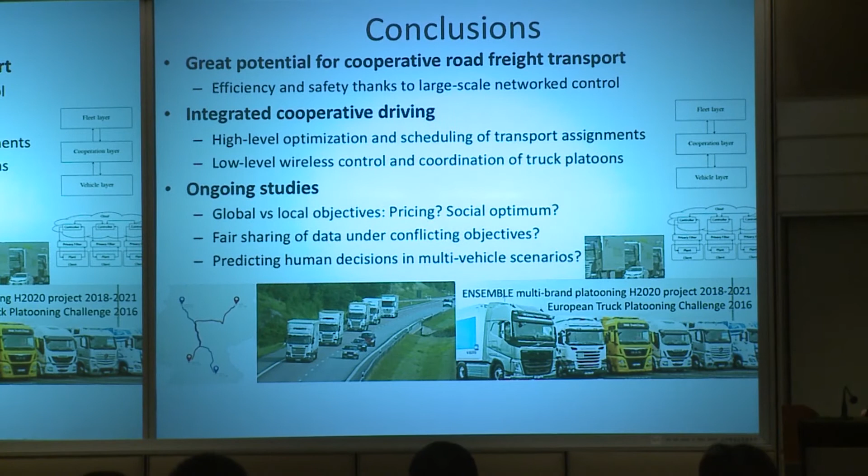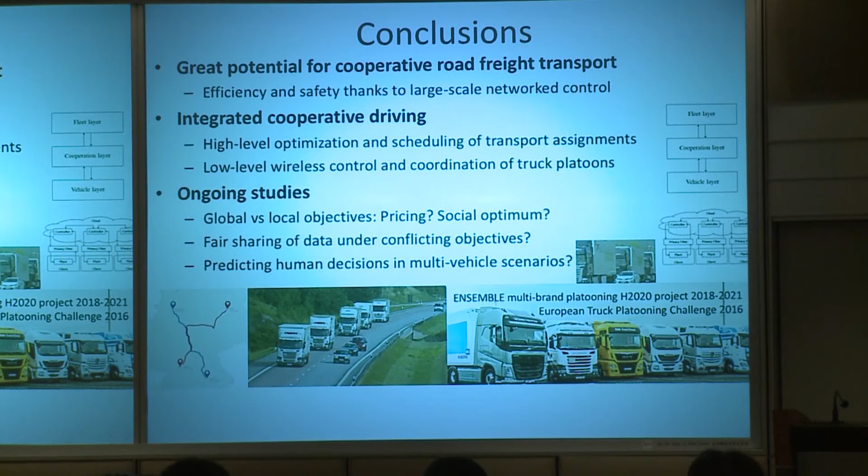I also mentioned this about human decisions. It's not just us in Sweden doing these things - there's quite a lot of activity. In Europe, all 6 big truck manufacturers are involved. We're just now negotiating a new big EU project about to start, where there will be multi-brand platooning. So far there was no Scania going with a Volvo, or a Mercedes going with a DAF - it was always the same vehicles. How will this work with different vehicles? I think that would be very interesting to see.